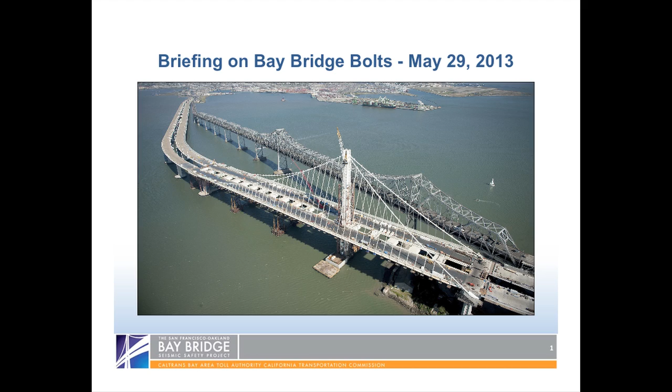I'm joined, as I have been for the last few briefings, by my colleagues on the Toll Bridge Program Oversight Committee, Andre Boutros and Malcolm Doherty. We're also joined by our project management team over at the far table, Andy Vermeer and Tony Anziano. Stephen Mahler, I think, is serving on jury duty. And Brian Maroney is joining them and will have a speaking part a little bit later on in the presentation.

We're here to give you a briefing on the bolts, and I have to start with news that I don't think there's any way to sugarcoat it, and that is we're going to need a little more time. We had hoped to have some decisions that we could present to you today, but for various reasons that I'll describe, we are not quite there yet.

Next slide. And maybe we could center the middle one a little, but maybe we can't. It's just up there on the ceiling. So look to my left and right. Don't worry, the titles aren't all that important.

So what have we been up to? What sort of progress do we have to report? One of the major items that we do need to complete before we make a decision about opening the bridge is a lot of testing. Malcolm is going to describe that in detail today, but we've got a lot of testing underway now, and testing that will also be accelerating over the next few weeks.

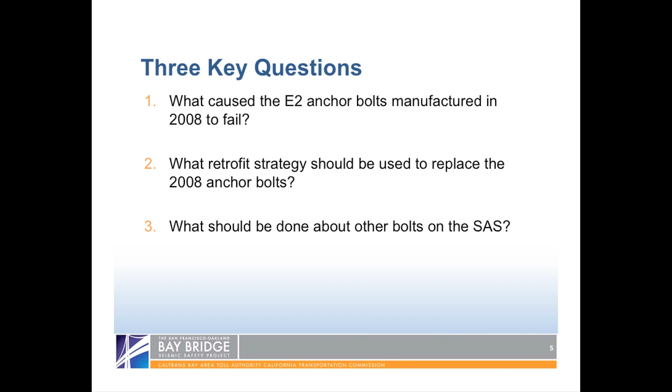So the first one we consider a closed matter, and the next slide just shows you the report that we released at your last meeting in summary form. The fact that the failures were due to hydrogen embrittlement, and that resulted from a combination of factors, as you recall: the presence of hydrogen, susceptible material, and also the tension that was brought to bear on those bolts. And that report is readily available to the public as well.

So I think at that point we need to move on to the second question, which is where I turn the presentation over to my colleague, Andre Boutros.

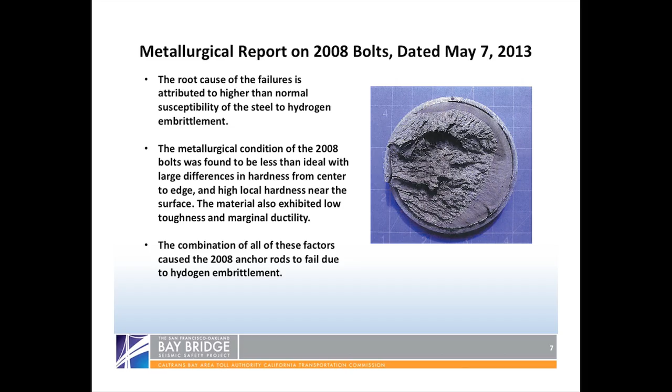We presented the selected alternative at the last hearing, and we had settled on the steel saddle as the preferred option to get to the clamping forces that the bolts had initially been designed to.

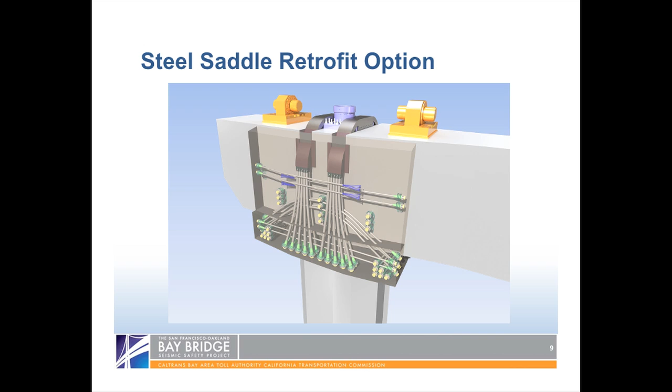So what you're looking at here is really a rendering of what that system would look like. Again, just for orientation purposes, the yellow elements are the bearing assemblies. The shear key is that bluish color element in the middle of the picture, and the saddle is the gray areas connected to the cables that you see here anchored all the way down below the concrete cap. There will be an extension of that cap to a certain extent, and the cables will be wrapped around the cap to get that confinement and that anchorage force that would have been provided by the bolt design that was in the initial contract plans.

This design, even though it's in the shop drawing phase right now, has actually been implemented in the field to a certain extent. The contractor has already begun chipping concrete and coring through the concrete to put those cables through that concrete system that is in place.

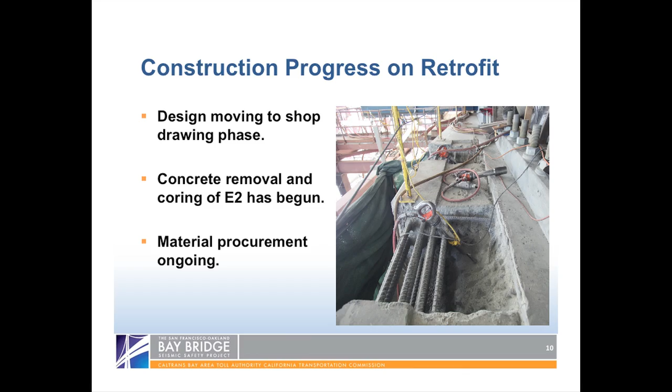Shop drawings are already in the preparation stages. They're being developed by the contractor and will be shared with the fabricator, who will use those shop drawings to fabricate that assembly system that will be placed on top of the shear key plate. The fabricator, as Steve mentioned, is a local company on Mare Island. The work will be done locally here, and we're hoping there will be some availability to view some of that work in place as it is being done.

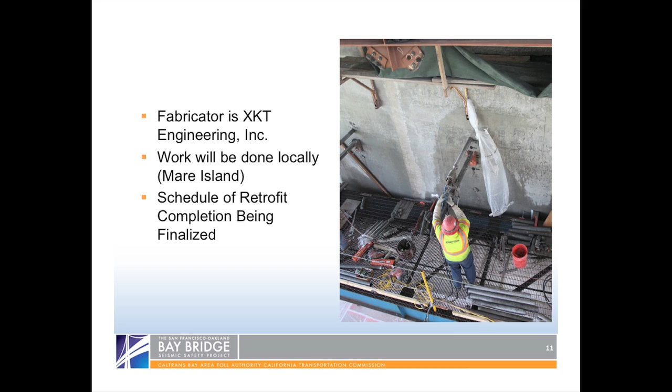The schedule for the retrofit is really being developed right now. It's being finalized, and it takes a lot of input from fabricators as well as the constructors that will be putting that system together. So since the shop drawings are being prepared, that's really the stage where that schedule will be laid out to see how long the fabrication will take, when that material becomes available to the field for placement, and how long the contractor will take to put that system in place.

So we are determined to bring you back a schedule at the July meeting to let you know whether that work will be done in time for the planned opening of Labor Day. And that's really what I wanted to cover today, and I'm going to pass it back to Steve here to cover the remainder of the bolts on the SAS.

Thank you, Andre. Again, the third question is about the remaining bolts, and again, we've mixed up the order a bit. You're used to hearing from Malcolm first, but you'll hear from him third today because he's covering all the testing information, which is quite considerable.

Next slide. As a reminder, there are lots of bolts. The grade of these bolts is A354 grade BD. I apologize to all the engineers who insist on calling these things rods. Some of them are rods, some are bolts, some are anchor bolts, so I'll just say bolts. And they are at various locations across the steel portion of the new bridge, the SAS.

You'll see the blue here, the West Pier on the far left, the top and the bottom of the tower, in the saddle, and also in the tower foundation, and then also in the anchorage to the east, as well as the East Pier, where we've had the most visibility, obviously, with the failures.

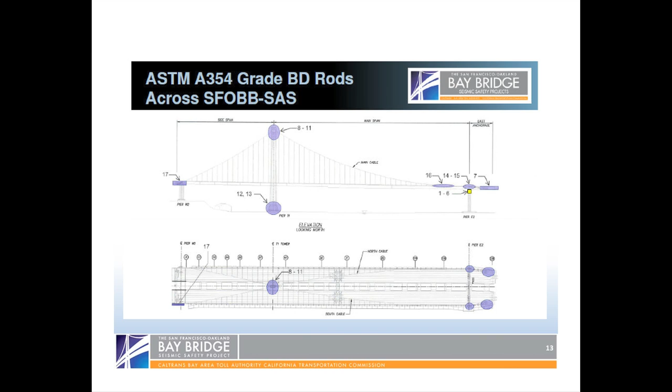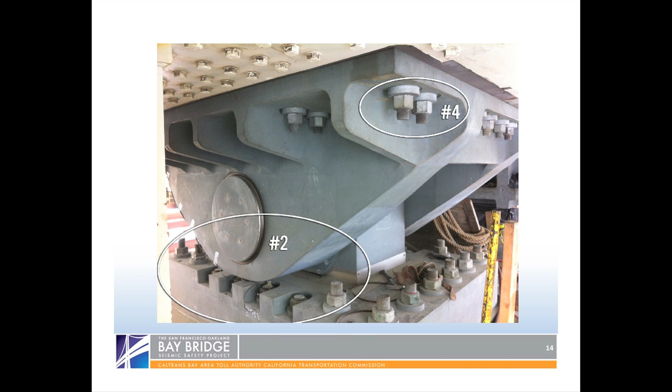Right now, that space where the worker is and where those rods are lying down is actually called the splay chamber, which sounds a little bit medieval. But what it is, is where the cable splays out and is anchored into the deck. So here is another clearly critical location where these bolts are performing the function of holding down the main cable.

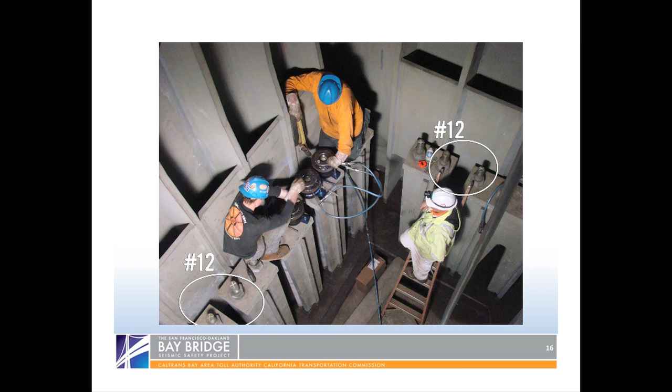As a reminder, we have done a lot of regular inspection, not only before the bolts broke, but after they did. And we spent a lot of extra time after they did inspecting the remaining bolts that are on the bridge. Based on that inspection, as well as the ongoing testing we are doing, not only on the site but in the laboratory, the remaining bolts, with the exception of the 2008 bolts, continue to perform as designed. No other observed problems or failures.

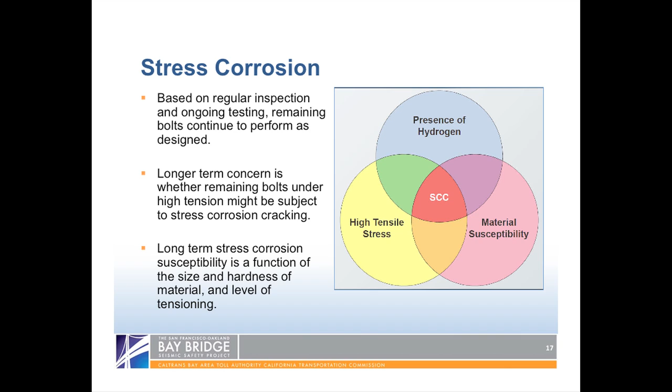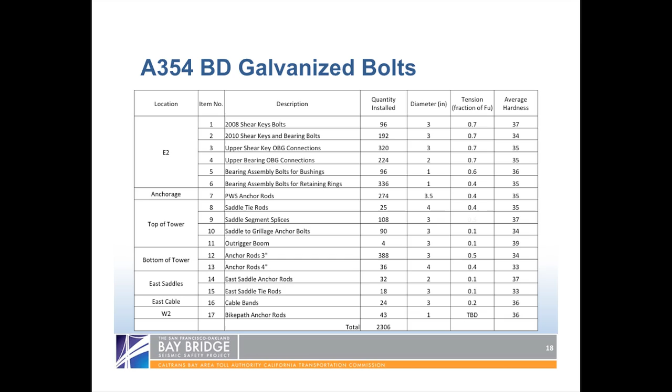Now, what we're showing you here for the hardness information is averages that we developed during the quality control process. Malcolm will describe a testing procedure that is going to give us much greater specificity about that hardness, not only on the site, but also within the bolt itself, from center to edge. And it's especially the edge that we're concerned about.

But even just as you glance through this information, let's use item number 1, the bolts that failed, as the comparison point. What you see is a fairly high level of tension—this is on a scale of 0 to 1.0—and an average hardness, where the range acceptable under national standard is 31 to 39. You see a fairly high hardness as well. That clearly raises a concern in terms of stress corrosion cracking, and in fact, in the case of those bolts, because of the imperfections noted in the metallurgical report, it actually led to their failure through a hydrogen embrittlement process.

As you look down the list, you will see that on the east pier, most of the bolts are under that same tension level. So we're spending a lot of attention on the east pier in terms of testing, but you'll also see that the 2010 lower bolts, item number 2, have the same tension level but a considerably lower hardness level, which is obviously a leading candidate to explain why one set failed and the other didn't.

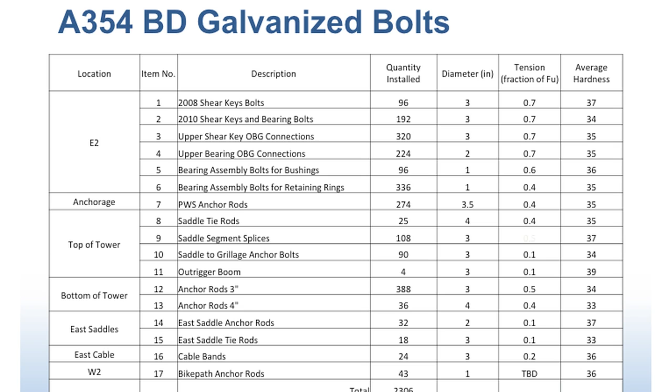As you look down the list, you'll see generally lower tension levels, and that's obviously good news. What we don't know, and what the testing will help us determine, is how low do you want it to be? You need it high enough to perform the function the bolt is performing, but also as low as you can get away with to reduce the potential for stress corrosion cracking. Likewise, when you look at the average hardnesses, you'll see many bolts below the 37 hardness of the bolts that failed, but some at it or higher—that's where we're going to pay a lot of attention in the testing.

It would make sense to address bolts especially susceptible to stress corrosion cracking, and to do so relatively early in the life of the bridge before the issue develops, since it tends to develop sometimes over decades.

We also have other tricks up our sleeve for some of the bolts, such as dehumidifying their location, which helps reduce hydrogen, one of the three factors needed for stress corrosion cracking to occur. Another factor we could reduce, for some bolts, is the tension level they're under, which is another way of reducing the potential for cracking.

Finally, there are other corrosion protection materials and processes we might employ in addition to the galvanizing that is on all of these bolts today, as a way of protecting them against cracking and corrosion.

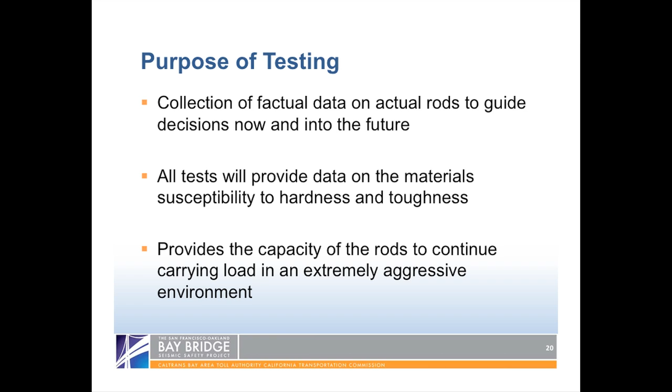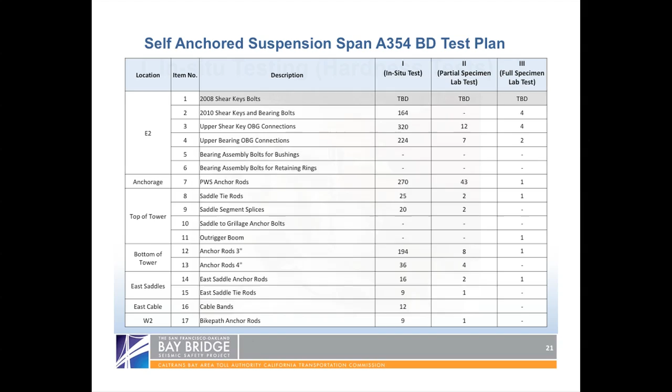There are three different types of testing we are conducting on the A354 BD bolts. This is a summary of the test plan. Just about all the bolts in the first testing column will be put through in situ testing, meaning we will test those bolts specifically for hardness in the field. We will go out there and do that with different machinery—I'll show you a picture of that. We will then take samples from those bolts for specimen lab tests.

This means taking a half-inch diameter portion of the rod and subjecting it to different tests. This shows which bolts we will be doing that to. We will also be doing full-scale lab testing, where we extract a rod or bolt from the bridge and conduct full-scale lab testing so we can analyze all the information we need.

Really what we are doing here, I think Steve articulated very well, is looking at the stresses that we know each of these bolts and rods are under. We're assuming a certain amount of presence of hydrogen. The third component is the material susceptibility, and this test will provide us data to try to make that determination about susceptibility. But one thing to keep in mind is that all these bolts are in the field and have been in the field, tensioned up, and are performing for some time.

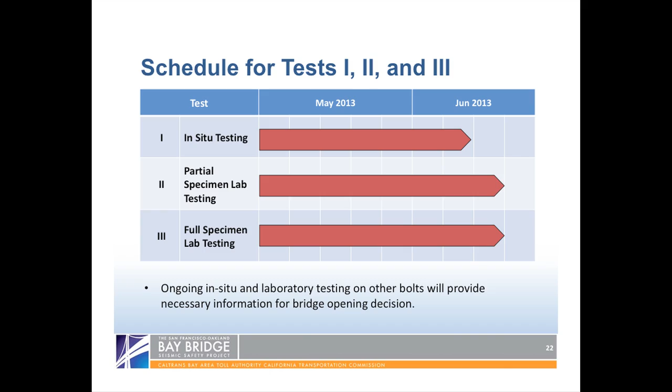This slide shows a rough schedule as to when we will complete these tests: the in situ test out in the field, the specimen test, as well as the full-scale test. You'll notice the timeline takes us to about the third week of June, and that information will contribute greatly to us making a data-driven decision regarding the safety of the bridge, as to whether or not it can be opened on Labor Day, depending on the outcome of that information and what it provides us as far as the condition and susceptibility of these bolts.

These are some pictures of the in situ testing, the hardness test. We actually go out and test - Steve talked about the significance of hardness on these bolts. We can do that test out in the field, and it allows us to do that test on nearly every bolt that is in this category.

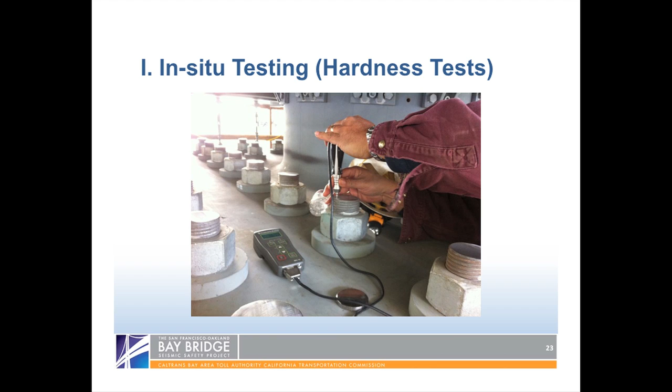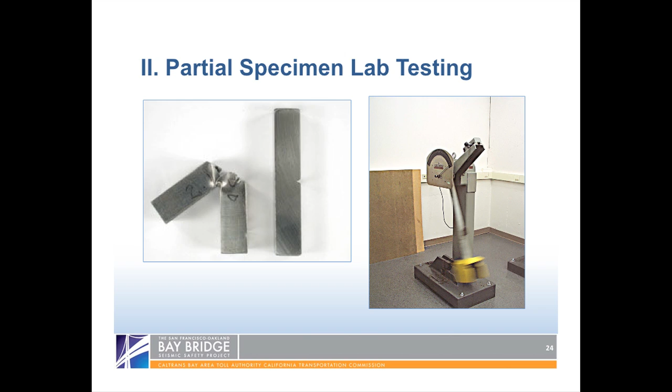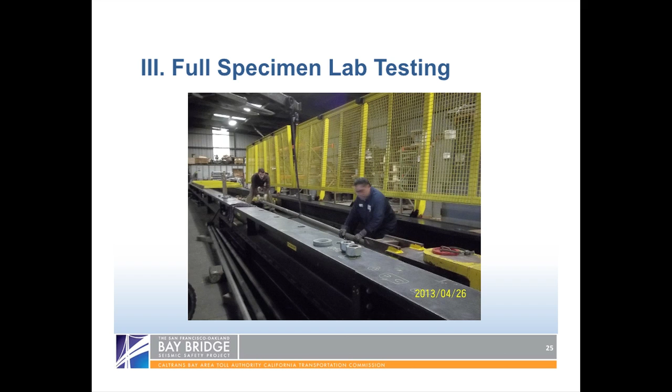This is a partial specimen lab test where we take a portion or a sampling out of the rods in the field, and we can subject them to much more destructive testing, such as elongation and strength. And then the last portion is where we take a full segment of a rod and subject it to a tensioning test to see how strong it is in the lab. Again, all this information will feed into our decision making, making us smarter about the condition of these bolts.

Thus far, we have completed a significant amount of testing and collected a significant amount of data, and it is showing a differential between these bolts, the other bolts, and the 2008 bolts, which failed because of hydrogen embrittlement.

Steve talked about the long-term stress corrosion. So there's an additional test that we're doing to try to determine the susceptibility of all these rods to long-term corrosion and what concerns we may or may not have regarding that factor. The Townsend test is an accelerated test being prepared to determine that longer-term susceptibility.

It will essentially subject full-scale rods to decades worth of corrosive weather, simulated while we do full-size bolt tensioning to see how they react over time. This is to determine whether or not we have a concern about the performance of these bolts over decades from now.

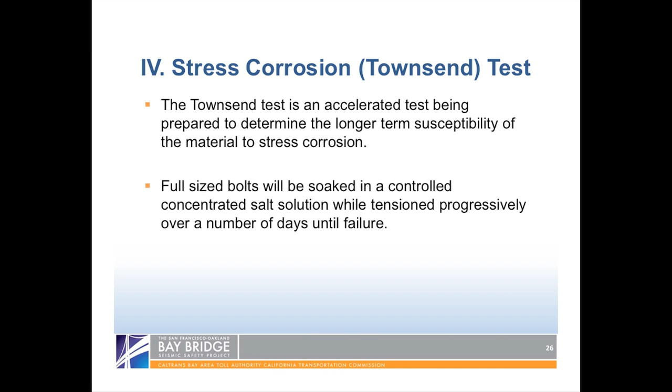This is a very involved test that we are subjecting these additional rods to. This is a blueprint or a detail of what this Townsend test rig looks like. It took a design to develop it, and it will take time to actually fabricate and build it.

And then it is a test that lasts for approximately 25 days, and it involves a saltwater bath to simulate that long-term corrosive environment, so that we can see how the metal reacts to that, to see whether or not we have any susceptibility concerns for the long term.

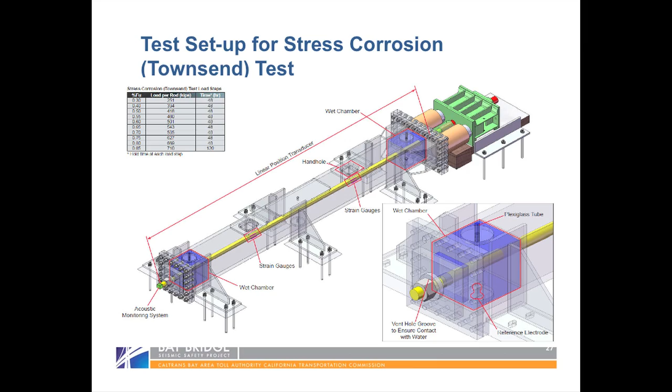With that, I'd like to summarize briefly that we are testing the full audience of bolts to a multitude of tests to ensure that we have a level of confidence to move forward in one fashion or another.

All data thus far is showing us a clear distinction between those bolts and the 2008 bolts, but that's partly why we have to defer this decision to July 10th - we have to complete all that testing so we have all that data in hand and can make a completely informed decision as to how we go forward. But again, the initial test, the in situ, the lab test, will be completed by the latter part of June.

In addition, we are conducting the long-term corrosion test that will be completed in July. And that test, again, is not necessarily akin to the decision for opening, but potentially what the disposition of these bolts are over time, and it may lead us to a position where we need to replace bolts after seismic safety opening, if the bolts and the test reveal to us that they will not perform at opening.

All test methods, data, and decisions will be reviewed by our expert peer review panel and by the Federal Highway Administration before the Toll Bridge Program Oversight Committee provides a report, and any decisions will be based primarily, focused on public safety.

We are well on our way to resolving the issue that came up with the 2008 bolts, as well as evaluating the performance of the other bolts as was described today. There are a few other items we'd like to update you on, and at this time I'll invite Brian Maroney, the Toll Bridge Program Chief Bridge Engineer, to describe other challenges we've encountered on the bridge and overcome, either in the past or currently.

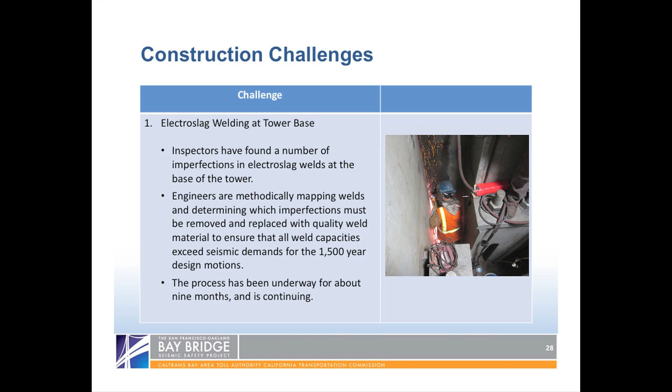The first one is electroslag welding at the tower base. I'm sure you've all been out to see the bridge and are familiar with its basics. At the center, the self-anchored suspension bridge has a single tower structure, but it's actually 4 towers right next to each other. Architecturally it looks like one, but there are 4 elements, separated and connected by linking beams. At the very bottom of that 500-foot tower are about 30-foot high pieces of steel, with about 20 welds connecting the bottom.

They're not used for self-weight, not used for truck traffic—they're only used during a large seismic event. Right now they're all welded up, and we've found a number of flaws in those welds. There's lots of steel, but there are some flaws inside this weld material.

You might say, if you're only using it for seismic, isn't it important to get everything just right for seismic? In a large seismic event, we believe some of those indications, some of those flaws, would grow. So I'm still convinced it's appropriate to move the public onto the new bridge, even with some of these flaws still in place.

But through construction inspection and materials inspection, we've found a number of indications, and some we've already communicated to the contractor. They need to be taken out and removed, and the contractor is proceeding with that. Others are very, very clear.

Others, it's very, very clear that they're imperfections, but they do not impact the performance of the bridge. So they're acceptable. It's not necessary to dig them out.

Then there are some in the middle, in between those two limits, and what we're doing is evaluating those. We're using finer field electronic equipment to map those out, and we're actually going to be doing some testing on a sample piece to test a piece of steel with those imperfections and deform them just the way they would be deformed in a very large earthquake.

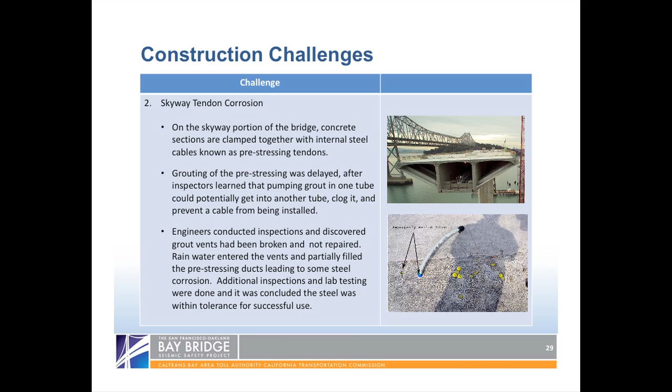They stick out maybe a few inches, and you can see right here what one of these looks like. This is the deck on the Skyway — you're looking down on it, and this is one of those plastic vent pipes right there.

What happened was, during construction, while we were waiting to get all the pre-stressing ducts stressed and grouted up, some of these were probably run over by cars. Somehow they were broken, and while broken, they weren't maintained, and water got in — rainwater probably, perhaps sprinkling water while the deck was being cured — but nevertheless water got into these ducts.

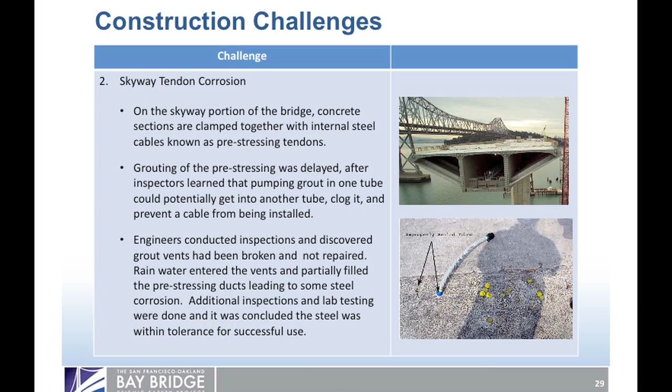And that's a serious issue. We took it very, very seriously. I want to let you know, the first thing I did was mobilize our corrosion engineers.

I communicated to the FHWA California chief engineer at that time, Nancy Bobb, what we had found. They brought in their own corrosion engineers from the East Coast, and a team was put together.

We actually developed new technology never used before at Caltrans. In fact, because of this, Caltrans was the first Department of Transportation in the United States to use a borescope. It's the same kind of technology used when you have knee surgery and a doctor puts a probe inside your leg to work on your knee. They also have cameras with magnifying lenses and can take videos.

So what we did is we actually opened up the bridge and inserted this probe, and we collected more than 5,000 enhanced photographs, which we made available to the corrosion team that was reviewing this.

Some samples of the tendons were actually taken out of the bridge. We removed an entire tendon, and samples were made available to our corrosion engineers here in California with Caltrans, as well as sent to the FHWA corrosion engineers.

They evaluated the amount of degradation that had developed, of the worst of everything we had seen. At the same time, I asked my design team to go back to their design calcs and tell me how much capacity we really have.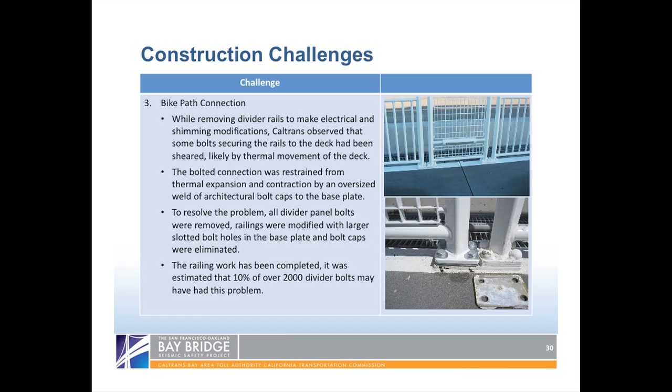This top image shows a section of the bike path. There's a line right there that you can see - that's a thermal expansion joint. The bike path is made of many steel boxes, about 30 feet long, so every 30 feet there's a little thermal expansion joint.

Just like when you walk down a sidewalk and see the lines in the sidewalk - that's to allow for thermal expansion. Things get hot, they expand.

Things get cold, they get short. And if you try to fight Mother Nature, you will lose. That behavior is going to happen. And in bridges, all parts of bridges, we have to allow for that. So that's what that is.

Now, part of the bicycle pedestrian hand railing spans that thermal expansion joint. And this was designed, every other one of these was designed to be able to slide. There's a slotted hole with a bolt in it, so that slot allows for that thermal expansion to work.

Well, right here there's a nice little architectural detail. It's like a cap that goes over the top of the bolt, and it was supposed to have just a little tack weld on it. Well, it got a big tack weld on it, and it melted through the cap, and it actually ended up connecting onto the head of the bolt, and it restrained the freedom that hand railing needed to have, and then the bolts sheared.

Some of the bolts sheared. And so I want to communicate, this is not a bolt material problem. This was about a detail where somebody was thinking, I'm going to get a really good weld, I'm going to put double or triple in. And what they did is they put too much in.

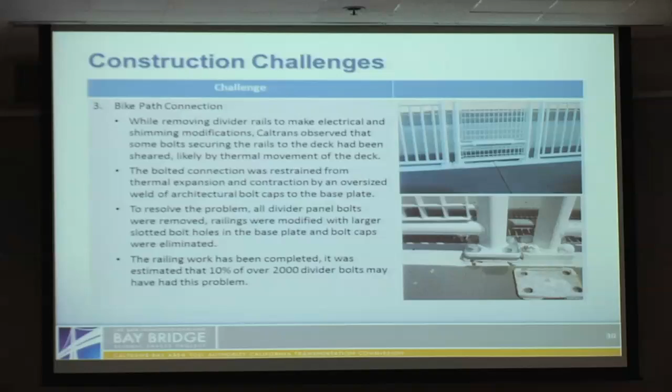Okay, the next one, if I can move to, is roadway box welding.

Well, that really refers to, we've got a lot of steel on this bridge. Even the Skyway has a steel nose, steel orthotropic box, one on both sides. But this just talks a little bit about basically welding has taken place not only at ZPMC in Shanghai, China, where the orthotropic box was fabricated, and the tower was too, but we've also done welding here.

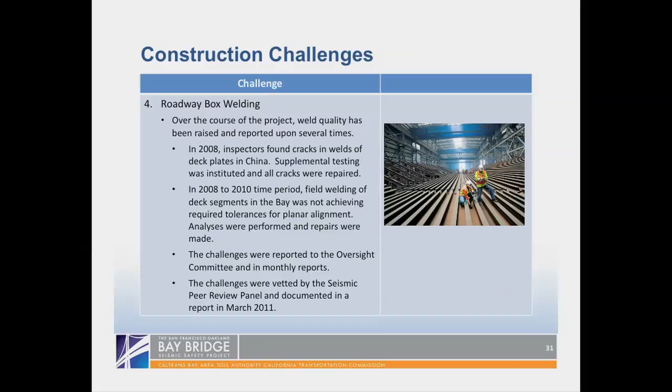So just to get a sense of it, there was, we had some challenges. Actually, we've had challenges in just about, it's always hard to build a bridge. And when we were welding, let's just talk about the boxes when we were in China. We had some welds that we were not happy with. And first thing you do is you evaluate them a little tighter, and I'll just share with you, sometimes we completely rejected, not just the weld, I mean we rejected the whole deck plate, everything.

Other times we would evaluate that, yes, it is repairable, and we allowed folks to dig them out and repair them, and sometimes that wasn't once. Sometimes it was dug out, repaired, and it's like, try again. It still doesn't pass. Try again, it doesn't pass, etc., until we were satisfied that yes, it's going to be just fine.

Now, there was a lot of excitement about welds in China, and I can tell you that really is unfounded. Because in China, I was quite surprised when I went over there, and there I'm looking at a brand new Lincoln Arc welder, the best welder you can buy here in the United States, and they don't have one, they have two. And they follow our welding code, because we took our welding code over there, American Welding Society, AWS.

D1.5. D1.5 is the bridge code. D1.1 is the building code, and the bridge code has fatigue involved because trucks go over things over and over and over again. So we actually have a higher criteria.

Now, there was a lot of excitement about it, so what we did is we actually generated a very large report that documents the percentages of rejection rates, etc. And obviously what we learned when we organized it all and put it into one report - and by the way, we did have the chair of AWS D1.5 Bridge Code review it. We had the chair of D1.1 review it. We had several outside specialists review that package, and then we presented it to the peer review, and they actually sent the report back to the TBPOC. One of the things that is interesting there is in China, the welds were so automated.

We actually put weight inside this cantilever to manage the elevation, so the top of that Yerba Buena Island deck where the cars go matches up just perfectly right here with the top of the SAS. Now some people go, gee whiz, you put ballast in, you actually weighted it down? Yes, and that's the way it was in the original plans. Now we did have to up the weight a little bit, but we always had planned to do that, and we were monitoring it, surveying it continuously because we wanted it to match just right when we got across it.

Okay, next one, Andy. I've also been asked to share with you some of the things that I think are innovations and things that are very special. I'll run down this pretty quickly, but the first thing I want to share with you is that this bridge, we have maintained what the Governor's Board of Inquiry wrote in this book.

For the first time ever in the United States, there was a desire in earthquake country to have a bridge be recognized as an important bridge. The building world was ahead of the bridge world at that time. A fire station, a police station, a school, a hospital - those are recognized as buildings that we should invest a little more into because of the value and purpose they serve. Well, the Governor's Board of Inquiry, chaired by George Housner, who's really like the father of earthquake engineering, recommended making the Bay Bridge an important bridge.

Now, the standard across California and the United States is, after an earthquake, no collapse is all we're shooting for. As bridge engineers, we associate no collapse with no loss of life. So if we have to tear down a bridge after an event, as long as it didn't fall down and nobody died, that's success. That's standard, and that's over 99% of the bridges. A very few bridges in California have this label. The New Benicia Bridge has this label. The Bay Bridge has this label. Richmond San Rafael does not have this label.

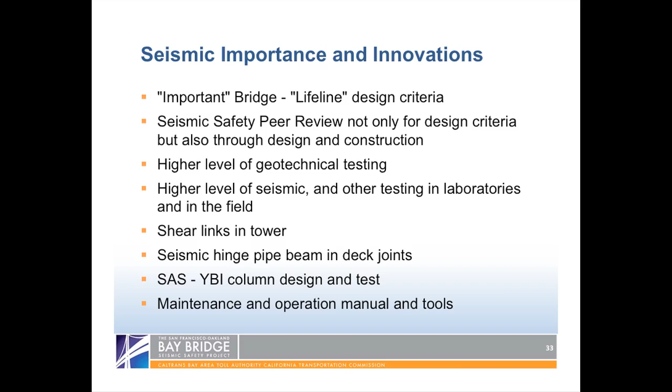The seismic hinge pipe beams in the deck joint, fantastic, and actually I think Andy Vermeer has a video that he can run.

Can you turn your mic on? Keep your mic on. Brian, why don't you go through the next slide, and then we'll talk about those two afterwards and move on through with the presentation.

Okay, very good. I'll talk a little bit about the hinge pipe beam when the video is shown. And then the SAS YBI column design test - I want to share with you the self-anchored suspension bridge, very exciting architecturally. It's asymmetric, very long forward span, short back span, and the short back span is on rock. And the forward long span is on soil.

So imagine in an earthquake, you have this short, stiff column vibrating at high frequency, and then you have this really long, flexible column doing this on the other side. What it does is they're not compatible - they twist each other and they don't share well. In the beginning, the very first designs, the distribution of shear, the distribution of work that those columns had to do was about 90% to the short, stiff one and about 10% to the tall, flexible ones.

We actually did something really amazing. We went down into the ground 15 meters on Yerba Buena Island and cut a hole to make what appears to be a short column now a long column. If you go out there, even though from far away it looks like all the other columns, if you get up close, you'll find that they're not connected - the columns at W2 are not connected. So we did some very clever things to make sure those are more compatible, and we actually got it down from a 90-10% distribution to a 60-40, which is really fantastic.

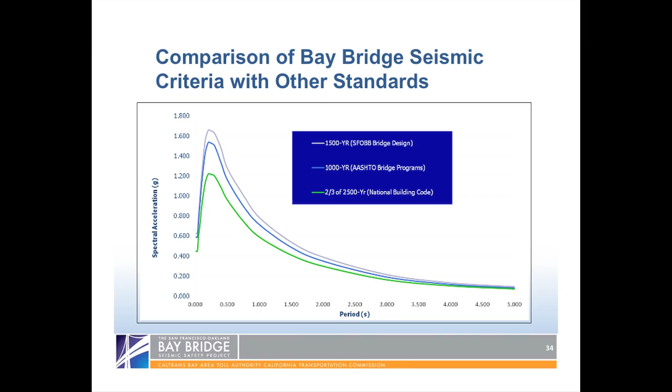The next curve up, that's the 1,000-year return period motion - that's the standard in AASHTO. And the top one, that's the Bay Bridge - that's the 1,500-year motions. And I also have to tell you, these are not just linear. That little bit right there, that costs money. Those 1,500-year - that upping from 1,000 to 1,500 - it cost us dollars.

So I do want to share with you the ground motions, and actually Norm Abrahamson, this is the guy who did our ground motions. He's also the person who develops ground motions for things like Yucca Mountain, where the world keeps all the worst stuff in the world. He actually told the LAO review group a couple weeks ago that this project defined new state-of-the-art seismic ground motions.

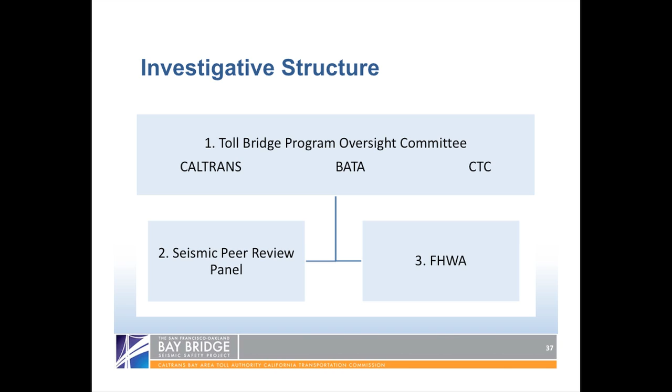And finally, as you know, we have asked, out of an abundance of caution and to try to assure absolute independence — because all of us have been working on this bridge, that's true — we've asked the Federal Highway Administration to come in and look over our shoulder, and they've agreed to do so. We think that is the definition of an independent investigation, and that's what is underway.

We are working on it. It's not done yet. We want to share a draft with the Federal Highway Administration so they review it and agree with it, or if not, tell us what they think is wrong so we can fix it. And that is step one.

Step two, as we've indicated earlier, we need a firm schedule for the retrofit of the 2008 bolts that says we can make Labor Day. If the schedule doesn't say we can make Labor Day, we're not going to make Labor Day in all likelihood. And thirdly, we need a decision on the remaining bolts on the bridge. As Malcolm indicates, we've got a lot of testing underway. I think he misspoke just in terms of July versus June.

That testing is going to be done in June. The long-term stress corrosion test will go past that point, but that test is looking at long-term stress corrosion, not giving us information we need about opening the bridge. The other tests will do that, and those tests we forecast will be ready by late June.